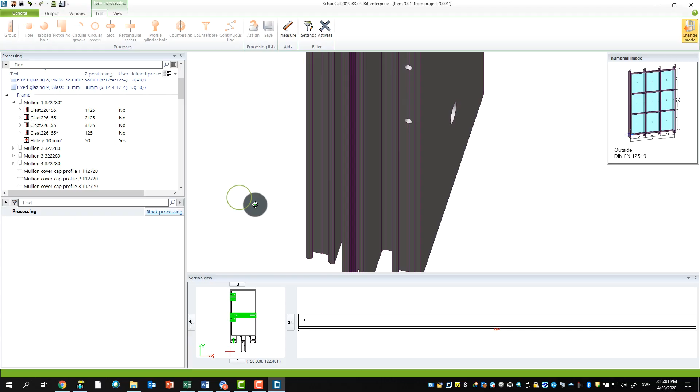Welcome back. Now, my next example, I would like to place a notching to the mullion as well. That means what I want to do is mill away the screw pocket here, and therefore I need to add another processing. I do the same way as before.

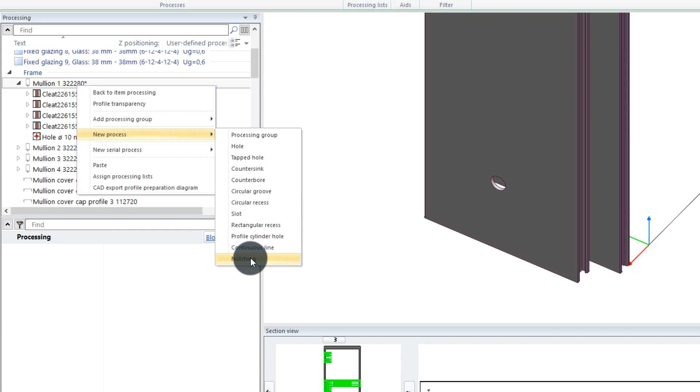Go to mullion number 1, right click, say new process, then go to notching. Now you see, as before, my mouse is catching the endpoints here and also the sides. I can go on the front side or on the left side.

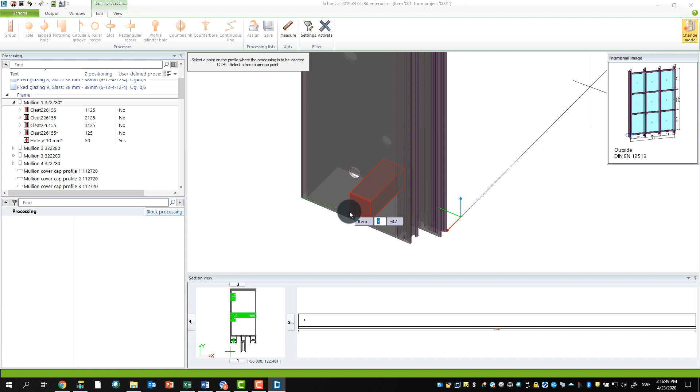And if you need to place the work operations on a different side, which you can't reach in this view, you can always press the shift button, hold down the scrolling wheel on the mouse, and slowly rotate the profile. Like this.

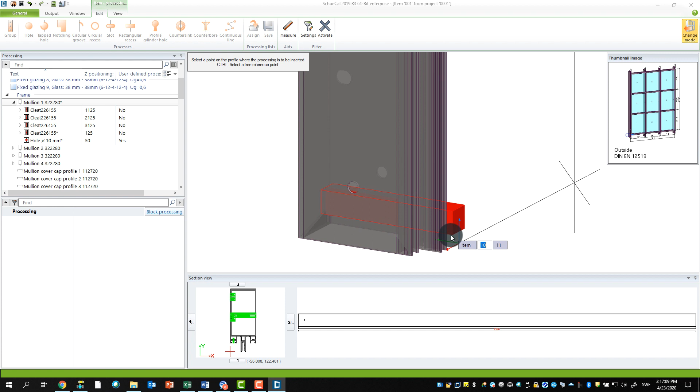But in my case, I want to have it here because I want to take away the screw pocket. So I try to place it roughly maybe to the gasket groove here. On that point, I click with my left mouse button, like this.

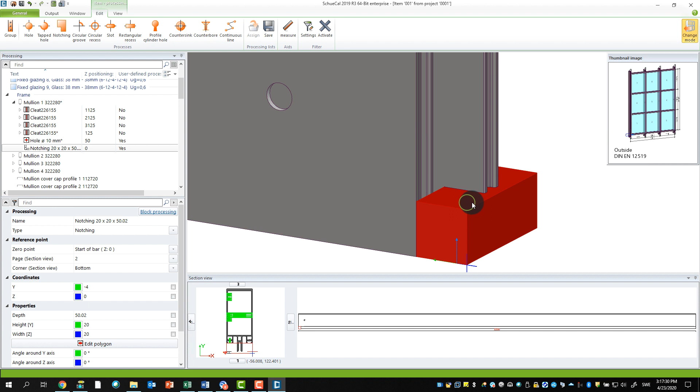It looks actually pretty okay, but it's a little bit too much maybe if I have it here. I don't need to take away this extra because this will take extra time on the machine. But I can always adjust the parameters to the left.

So if we go here to the properties, I can see I want to have the 0 point, the start of the bar should be 0. The page 2 is okay, I see it also here in the section view. And then I have the corner section is bottom, it's fine.

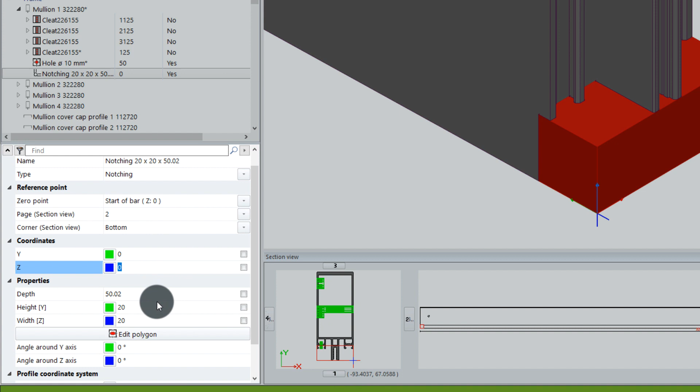And here I see, okay, it's not exactly correctly on the profile, so I switch this to 0 millimeters, already have 0, it's okay. And the depth is fine, it's 50 millimeters. And then we have the height and the width of the profile.

And the width in this case, look here, it's marked blue. This means, okay, this is in this direction along the profile. So if I want to make this notching higher onto the profile, I have to change this value. For example, I could say 40 millimeters, enter.

And you don't need to click apply anymore. This will also save you a lot of time.

So what do I have to change now? First of all, I will change the height in the Y direction, the green one, to 16 millimeters, because I know the screw pocket in FWS 50 is exactly 16 millimeters. Say OK.

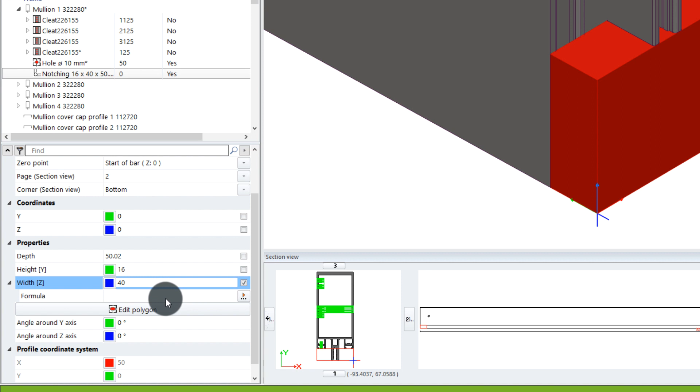And then I want to go to the width here, and like we did before, we do a formula, because if we change the floor recess for this element later on, we want the notching to adjust accordingly. So I go to width here, and it really doesn't matter what it says here, the formula is always default when we use one. Then I go here and click on the button, and for this function I use the floor recess as a formula. Say OK.

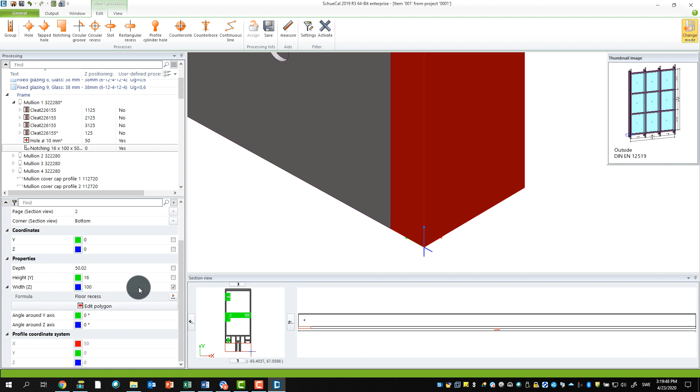And then you see here, width set is floor recess. Also you saw what happened here, because we have 100 millimeter floor recess in our element, it jumped up to 100 millimeters. And now if I change this in the element view, it will also change.

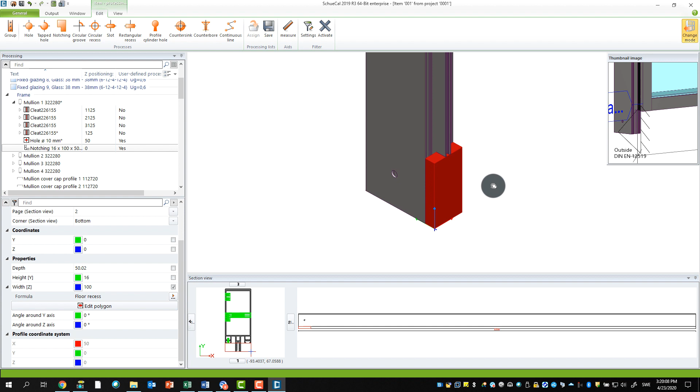So this is one example of how you could add a notching operation onto your profile. The thing is, we only did this now for the first mullion. We also need to do this for the second, the third, the fourth mullion. And maybe we want to use this processing for future projects. So what are we going to do to fix this?

In the past, we used processing lists. I think you're all familiar with those. What we did now is that we are replacing the processing lists. That means everything what you've done in the old SchuCal MCO mode will still work. All the filters, all the processing lists, everything you've done, nothing will disappear, nothing will get worse. Everything will just get better.

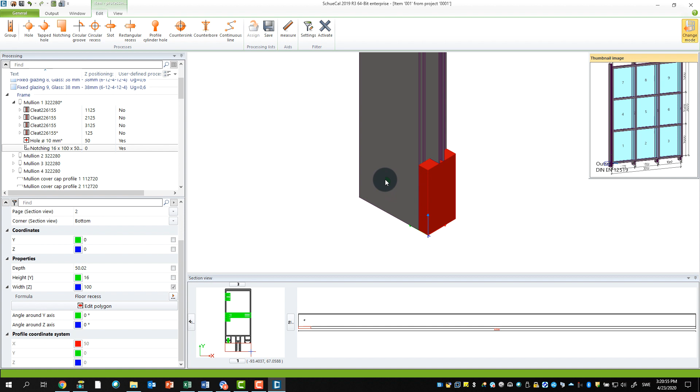So we now want to save these two operations to a processing group. And how do I do this? First of all, I look to the left, it's the easiest part to find my information here.

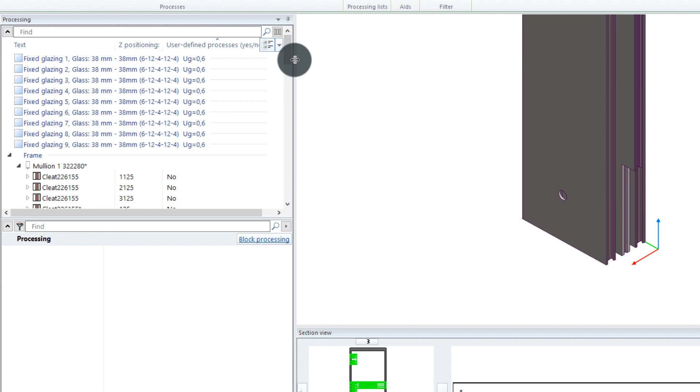If I don't find it, you can always use the new filter function. If, for example, I want to search for only user-defined processing, I click here on the arrow, and I say yes, only show user-defined processes. Now only the things I just did will be shown. You also see here that you have an asterisk next to the operations. This means this is something I made myself.

Always, if you change some information on a profile, for example if you move or change a T-cleat or a drainage or whatever, you will always get an asterisk, because this means you're now going away from the Schüco standard. You have done something yourself, and if something is not correct on the machine, then it's easy to follow up and search.

The same goes for the filters, for example. If you want to change something automatically every time for each element, you can do this, but you will also get the sign where it's done.

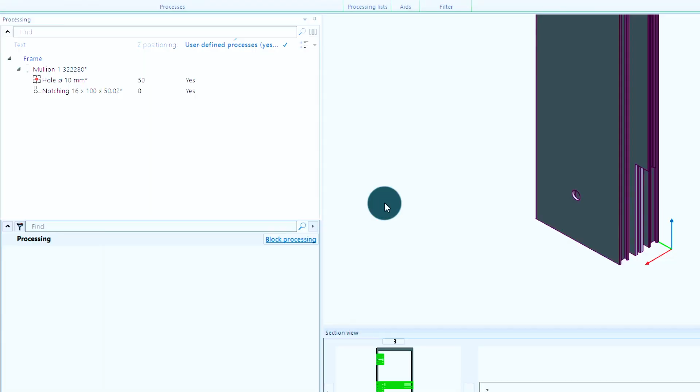So what I do now, if I want to save this, I mark those two working operations with the shift button, right click, and say I want to save this as a processing group. I say OK, and now I have a new way of saving everything.

That means we now have a folder structure like Windows Explorer, where we can easily sort everything up exactly the way we want it. We can save it in different folders with different working operations, different profile names or systems, or whatever we want.

I've chosen to work with different profile systems. So I say, okay, now I need a new folder for FWS50. I say new folder and name it FWS50.

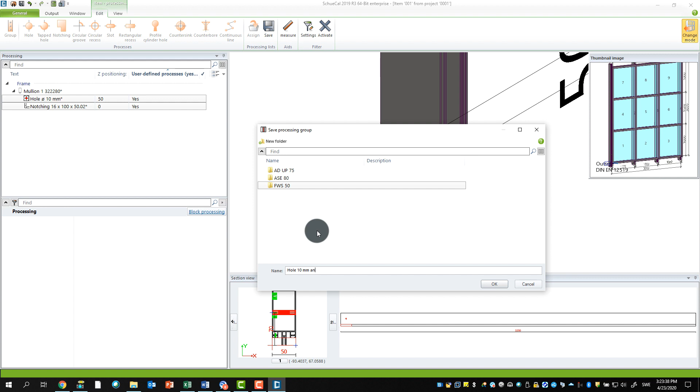And say a name. Now you should think smart when you're naming the processing groups, because they should also be easy accessible and also easy to search for. In this case, I say I have a hole 10 millimeter and notching.

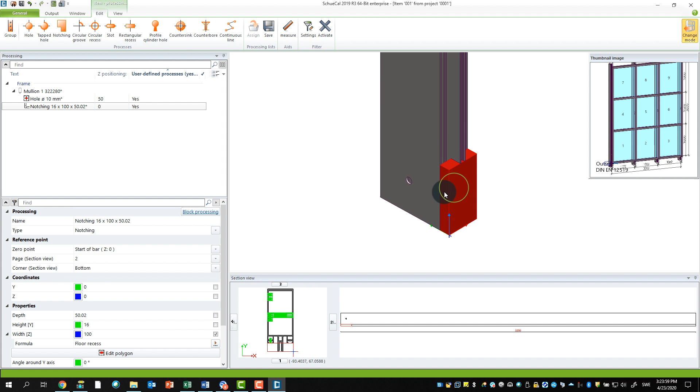I would actually make this more detailed, but for now I say this is fine, and I say okay. So now we have saved those two working operations to a processing group. That means I could delete those processing operations here. I could right click here and say delete, or I could go to the processing window, hit delete on the keyboard, or right click and say delete.

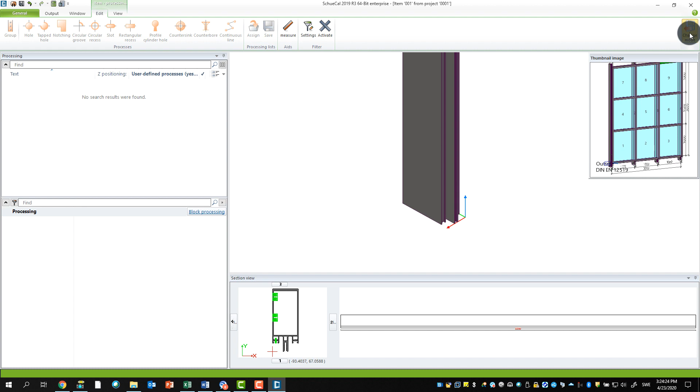So this is not deleted because I still save that as a processing group. Now I want to add this information to all the profiles in the element. Therefore, I switch to the element view, and now I want to add these working operations onto the 4 mullions I have.

The easiest way to select the mullions, you could of course rotate it like this, and you can select with the shift button one by one. This takes time and it's not the best way.

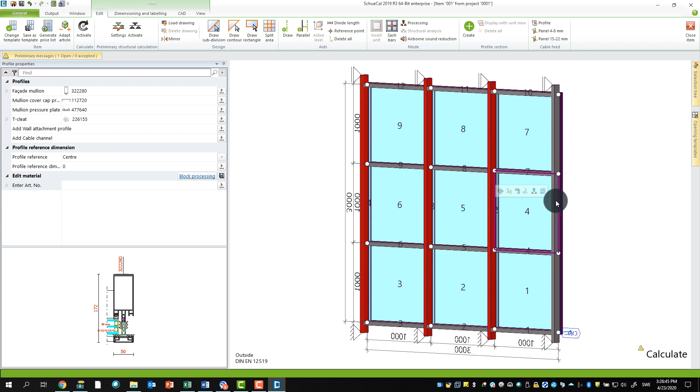Therefore, I would instead go to the selection tree up in the right corner. Here you can do all of the selections. In my case, I want to find the profiles, the mullions, so I go to Profiles. I see here the top 4 profiles are my mullions. I press the shift button and click with my left mouse, and I've selected all 4 mullions.

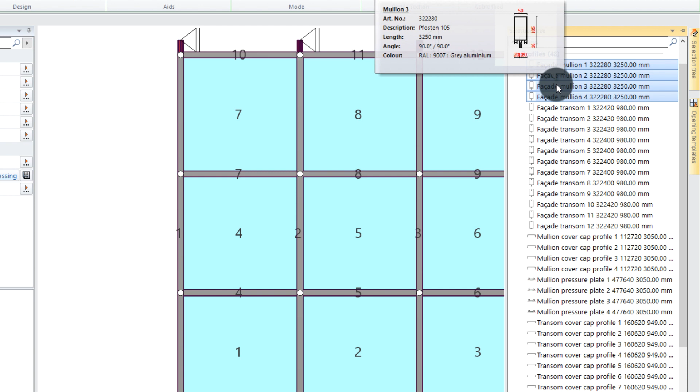Then I can right click on the selection and say Add Processing Group. And where do I want to have the start point? I want to have it in the bottom of the profile, that means start of bar, so I click on the bottom here. And then I come into this folder structure where I save all my processing groups.

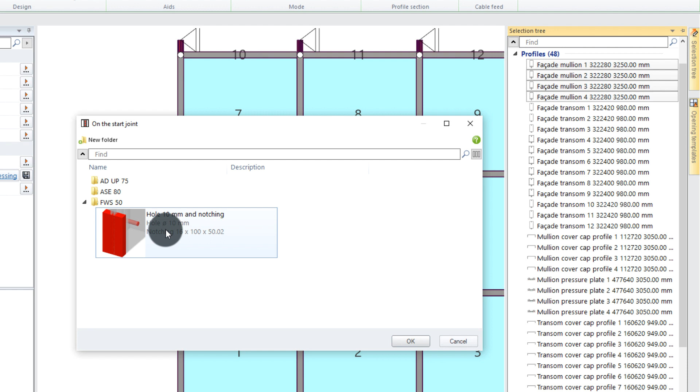And I just saved it under the folder FWS 50. I click here, and now you see, here's my processing group. You also see a small picture, which wasn't the case in the past, and this makes it also easy for you to find the right processing group to use. I click this, say OK.

And now you get a small notification next to each mullion profile. And if I now go back to my processing mode, we should be able to see that the working operation had taken effect everywhere. So I go to the processing mode.

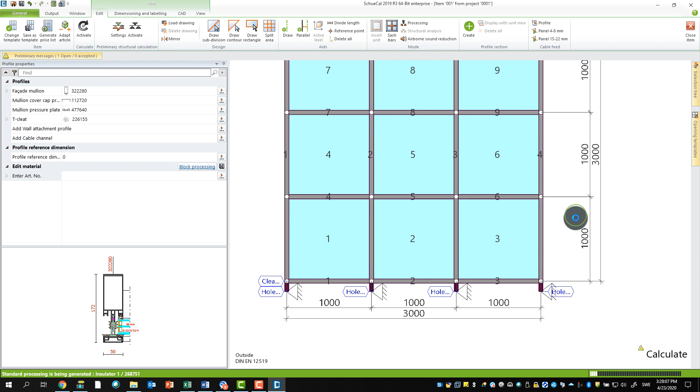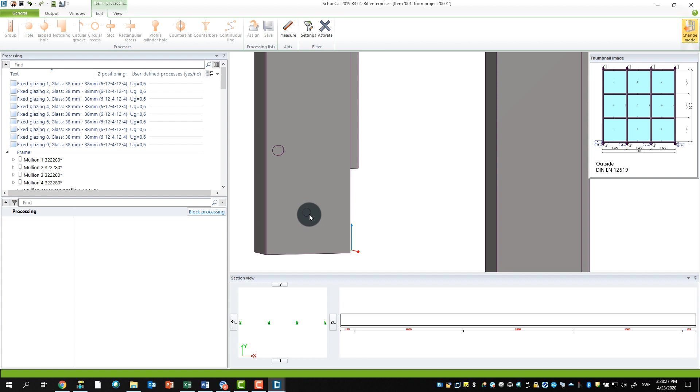I now marked all my 4 mullions. I go to the back, and I see here I have the hole, the 10mm hole, and also the notching, which is now the case for all the profiles.

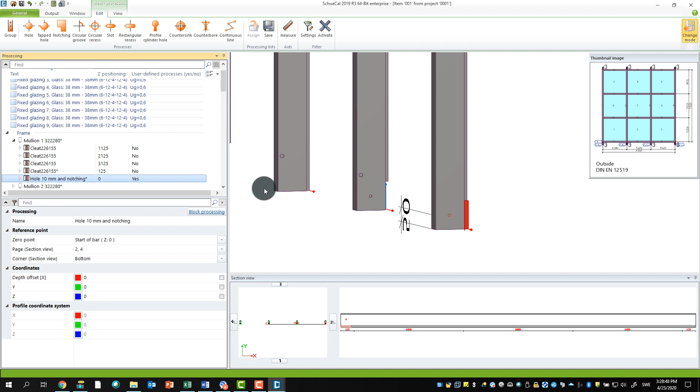And I also see them here in the processing window. If I go here, they're all marked. If I go to mullion 2, you also see it here. And this is the easy way of doing it.

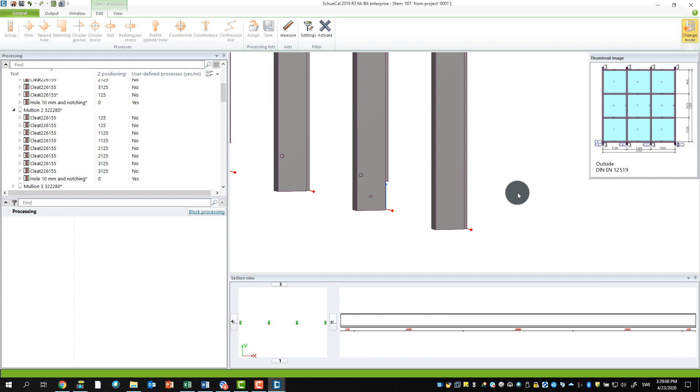So this is how you could easily add a processing group. And also, this is not only for this element, I can also use this processing group for all my future projects and elements. Now I presented to you how to do notching in the new MCO mode, and I hope you liked it.

I hope you liked it. I think this will make your life easier working with Schüco Machine Control.